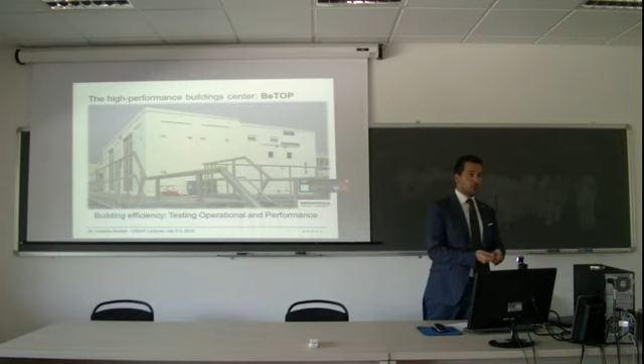Now, to give you the impact of that statement, the entire Canada is 32 million people. The GTA, the Greater Toronto Area, which means Toronto and the neighborhoods, is around 9.5 million, which means a third of the country lives in Toronto. For a large country like Canada, 6,000 kilometers from east to west coast, you have a third of the population in one city. The government has a clear mission to transform the way in which those people are living. In other words, when they give out money, they want to see publications, yes, but they want to see an impact in the way we transform the city of Toronto.

And the city of Toronto is going through a huge transformation, driven by the fact that these row houses are being replaced by huge condos. Our generation loves to live in the city center. We don't love this huge gardening 2 hours away from the core where we work. So everyone is basically moving here. We are making a huge transformation of the city. And if you're a building scientist, you are interested in understanding what kind of city building you can have.

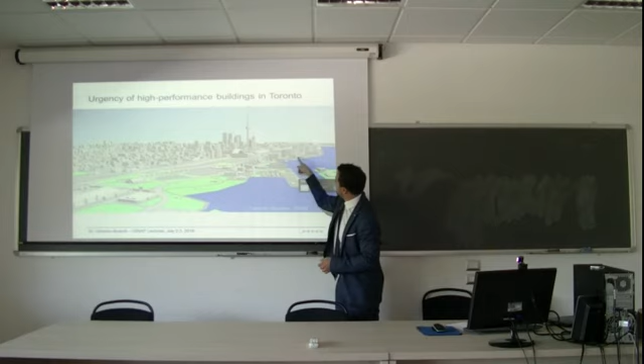And one interesting aspect of Toronto, this is only 10 years. Look what's going on. 10 years ago, it was like this, now it's becoming like this, already built in 2014. And if you see the transformation in 2024, it's basically booming everywhere. This side of Toronto is booming, this side has been demolished, and now it's building up. Typically they're building towers 70 floors high in order to house a lot of people. And the problem with this rate of construction is when you need a huge number of towers in a very short amount of time, what they're doing is just glass towers everywhere.

Now you make a glass tower in the climate of Toronto, you have a lot of problems, okay? So the reality is our mission is to try to understand how the construction sector can engage with a lot of sustainability principles while it's transforming at this rate. So that's actually basically my mission. It's my mission in my daily life, but it's also my mission with you this morning: try to understand what we can do to make sure that Canada can become a better built environment place.

Now, number one constraint: if you think about Canada, you think it's cold. We have a lake in front of us that is almost as big as the Adriatic Sea. So it's kind of a huge lake, okay? And the lake, in winter time, it's frozen. Imagine for one second that the Adriatic Sea gets frozen. It's frozen because we typically have -30 in winter time. So if you are a building scientist, if you are in building physics and you want to study this kind of principle, you need to take into account the fact that the first boundary condition in winter time is pretty chill.

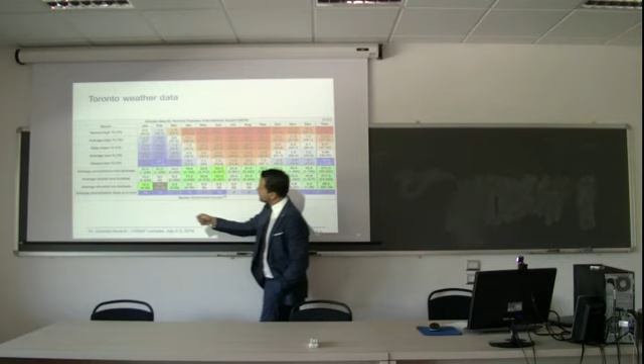So you have to deal with situations that are pretty critical, and then with situations that are 30 degrees in summer. So this is the weather data of the airport from 2 years ago. You see 34, 35 in summer, and at the same time, you see -20, -25 in winter. It's pretty tough to manage, and it's pretty dangerous when you are a building scientist.

So what are we going to do today, and tomorrow? I'm going to present the case of what we've been doing to provide new solutions to the building industry to help sustain this problem. I organized my presentation in different blocks. The first block, which is all we'll cover today, is introducing some nanotechnologies in the building environment. That means we'll work at a very small nanoscale of 5 to 10 nanometers. Everything you'll see today typically applies at a scale as small as a few nanometers.

So the presentation is broken into a couple of pieces. We'll start with phase change materials, then move to aerogels. In the middle there will be a coffee break to let you rest a bit. We'll spend about an hour on phase change materials and then probably 1.5 hours on aerogels.

Then tomorrow we'll increase the scale of attention. We'll focus first on building envelope systems, working on polyisocyanurate, polyurethane, new polyurethane with aerogel—building systems you can start touching. I'll show you some results, new products we've developed, patents we've obtained, that kind of thing. Then, to close the loop, in the last hour of tomorrow's seminar we'll take these nanotechnologies and apply them at the urban scale.

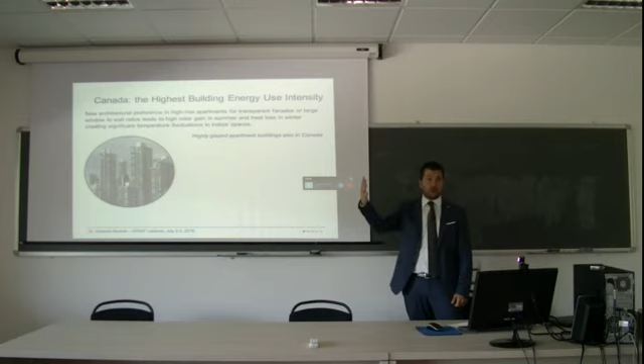You wake up in the morning in a new tower, and the glass is frozen. Remember the Frozen cartoon? The reality is these glass towers are typically frozen, because you sleep overnight, emit a lot of water vapor, the water vapor reaches the glass which is so cold on the internal side since outside is pretty cold, and the condensation freezes on the glass.

If you go on my Facebook profile in the morning, you see a lot of these nice photos of the frozen glass.

So our mission is to try to understand how we can improve the comfort condition inside the building. How can we actually do things in a good way? How can we make sure that the weather constraints become an advantage? Because remember, they're also pretty good if you're able to manage them.

Today it's going to be 36 in Toronto, but overnight it's probably not more than 9 or 10 degrees. So if you're smart enough, the only thing you need to do is shift the cooling night capacity over to the daytime, and that's it. But you need to understand how that can happen.

When you go to winter time, same situation. Typically the biggest problem we have in Toronto is that we need to make sure residential buildings and commercial buildings speak to each other, and we start using the connecting factor between the two.

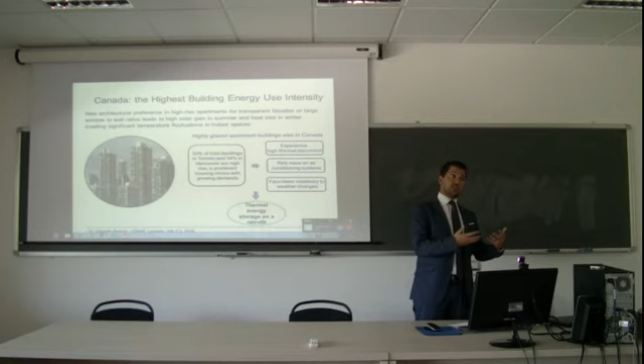One of the good things we've been doing, the City of Toronto has had a cooling district system since 2003, and currently the majority of the buildings are cooled thanks to a lake effect. What we do is take hot water, pump it into the lake, the water comes back cooler, and then we make an exchange water to air, and we cool down the majority of the buildings in downtown.

So there are things that we can do, and my topic of research is how can we scale up this capacity? How can we make sure that this is not anymore an exception, but becomes the general approach for the City of Toronto?

Okay, so the first subtopic in this part of the lecture is about thermal energy storage. Most of you know Luisa, I see a couple of people from Lleida, so these are all concepts that probably for the majority of you will be familiar. Luisa was here some time ago, so probably these are not new topics for you, but I want to give you a different perspective about these topics.

So first of all, what does it mean, thermal energy storage? It means that the material can actually store a lot of energy, if you want. And what I mean is it can store a lot of energy during a phase change from solid to liquid or from liquid to gas.

Now unfortunately the majority of the building codes, and the only prescription you have in North American building codes, is still about R value. I remember 10 years ago I was a PhD student visiting here in Italy, and there was a new regulation when they first put the concept of thermal mass into the code. They put that all the walls had to be at least 230 kilos per square meter. That was the beginning of the concept of thermal mass in the code.

But in North America, you still only have R value. In other words, nobody cares about the thermal capacity of your walls. However, people have started realizing that, wait a moment, my glass tower without thermal capacity is just unbearable - it's not really comfortable at all. There is nothing I can do to fix the problem if I don't introduce some thermal mass.

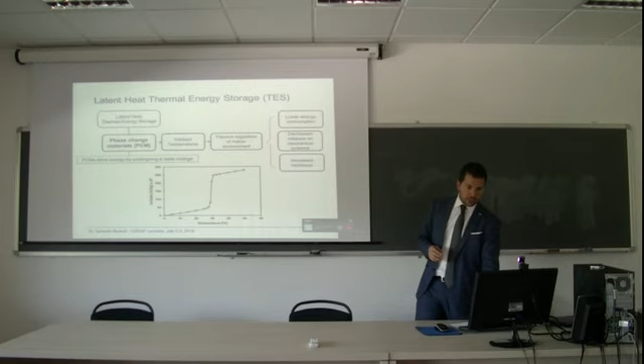So let's see actually what we can do on latent heat and what we typically do in Toronto. In Toronto, we have been working quite a lot on the different properties of different PCMs. And the main constraint of interest for us is the cheapest possible phase change material we can realistically propose to the building sector, to make sure that that material gets adopted by the building industry. So more than dreaming of PCMs that are super expensive and super protected by patents, we typically work on new PCMs that we produce internally in my lab, and we make sure that those products are so cheap that the economic barrier doesn't have to be a barrier anymore.

Now, because we don't only work in labs, but we need actually to make an impact in the city of Toronto, the reality is we often work on real buildings. So what I'm going to show you today is a couple of outdoor lab experiences, but also real buildings. So you will see today real buildings where we have introduced the PCMs.

Now, from a purely scientific point of view, if I present some of these applications to colleagues, they will always criticize them at some level. But please try to understand and align with my mission. My mission is, I don't want to study things that remain in a lab. I want to study things that actually get applied, with all the limits that this may result in. Now, last but not least, we are also trying to develop new PCMs, and I'm going to show you a few research works on those kinds of things.

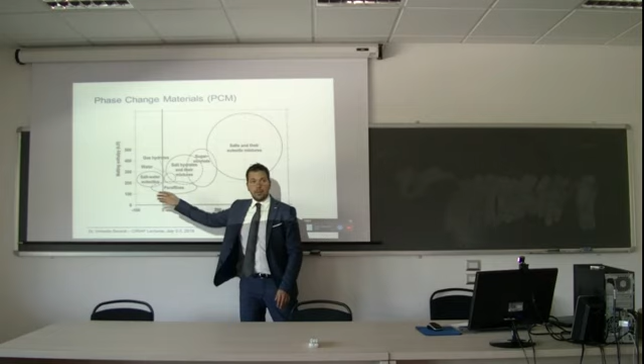So a material can melt at one temperature, another material melts at another temperature, and so these actually give you a different level of application. But then you see another kind of interesting property of materials, which is how much energy that material requires and stores when it actually melts. So you typically see these in kilojoule per liter or in joule per gram, depending on the way in which the material wants to be assessed, if it is in the solid stage, so the gram, the mass, or in the liquid stage, so the volume, the liter. But it doesn't really change that much.

So basically you can see that you have material that takes 100 joule per gram, or 200 joule per gram, or 300 joule per gram, or 400 joule per gram. So remember the water that was able to take actually 300 plus something joule per gram, and water melts from ice to water at 0 degrees, is here. Okay? Water is just one kind of phase change material somehow. Then here you see a vast majority of other products.

Now in a really ideal way, the best material, if you want to store a lot of energy, should have the highest possible melting enthalpy, and should basically be able to store a huge quantity of heat. So if I had to design in an engineering way my material, the idea is it should be always really here. So all these products are not really good because they don't really store a huge quantity of energy. Okay? Now just to anticipate what I typically do, I work with these kind of products, these very weak products. And you will understand why that's the case. But it's important that you understand there are materials that theoretically could store much more energy than the materials I work with.

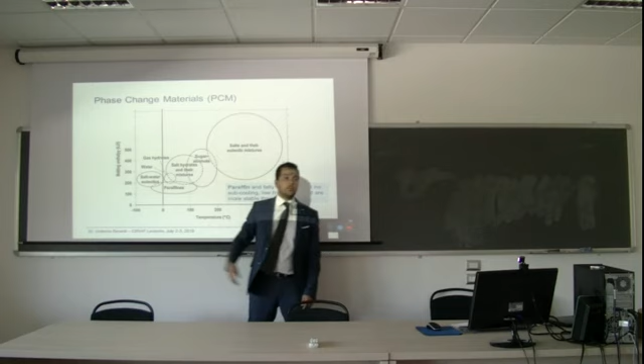Second characteristic: we don't want hysteresis. What is hysteresis? Here it means that basically the product can go cycle after cycle after cycle and not have any problem. It's very stable. It can do thousands of cycles and still not have any change. Salts typically have a hysteresis process. Over 1,000 cycles, they start to lose their properties. What does that mean? It means your battery. Look at this battery. Okay?

The battery of my cell, when I purchased the cell, was lasting 2 days. 2 years later, it only lasts 3 hours. Now, for a battery, you know this is the case. You throw away the battery, you don't care about that. But if that's actually your wall, what are you going to do? Are you going to throw away your wall? You don't want to do that.

So for you, basically in the built environment, the fact the material needs to be stable and not showing any kind of process that changes over time is quite important. So that's actually a boundary condition of why we work on these products. And pay attention, I'm still speaking about products, because there are thousands of different paraffins. So it's not easy actually to select the right one.

If you see this picture again, you see here a huge family. You have products that melt below 0 degrees, or above 100. They can take a latent enthalpy of 100 or up to 200. So what's the product we are going to work with? To select a product, these are some of the properties you need to take into account.

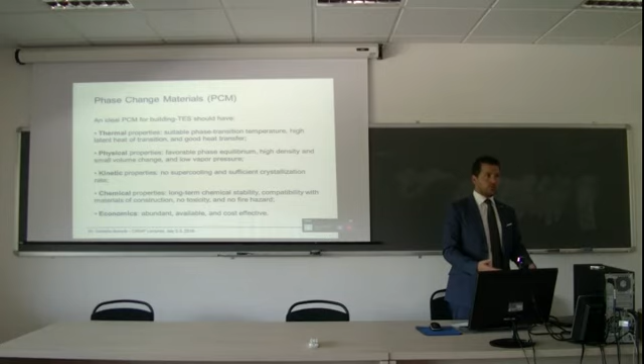So volume stability is important, long-term durability is important, subcooling is kind of important, and last but not least, cost. The majority of the phase change materials, but also the majority of the aerogels that a lot of researchers worldwide are studying, are pretty expensive. So my typical approach is I want to work with the cheapest possible product. It may be not perfect, it may have a lot of troubles, but it has to be cheap. It has to be affordable for the building industry in the range of a couple of years.

And I fully respect people working on better products that may be available worldwide 10 years from now, but that basically is not our mission. We get supported by the government only if we produce incremental innovation. We don't do transformative innovation, we do step-by-step guidance to the building industry.

So, paraffins, big family. Typically this is the chemical formula. I don't want to stress you with chemical formulas too much this morning, but the reality is, depending on the number of carbons you put, it changes the temperature at which freezing and melting is happening. So you can have a chain of carbons that is longer, and it will melt at a higher temperature. It may be shorter, and it will melt faster and at a lower temperature. So you can actually play with these kind of things.

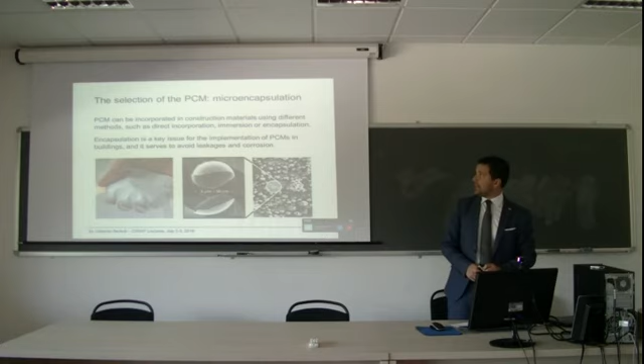Typically, the density of storage is no more than 200 joules per gram, so 200 kilojoules per kilogram. So it's not huge, it's not the best one, but it's actually cheap. So, a couple of applications of these products. When I speak about paraffins, typically we introduce paraffins in building products through 3 different ways.

First one, incorporating the product into a typical porous product. Think about a plaster. Think about a concrete. Think about products that you mix together and you shape together on the site. Then you can add the PCM to that product and get that process.

That's a very bad way to start with zero energy building design. The fact that you don't optimize the window to wall ratio, the fact that you've got almost 100% window to wall ratio, doesn't really make any sense. But the reason why we started in this way is because towers in Toronto are fully glazed. So we wanted to study how to make a fully glazed tower worldwide for energy saving principles.

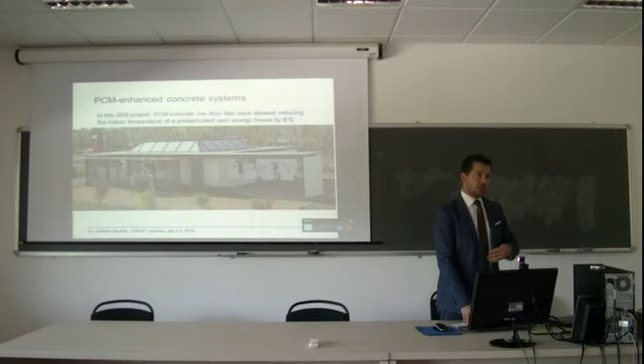Now, one way to control it possibly was through some kind of shading design. This was a shading design that was dimmable, so it was changing, it was dynamic. But here we are describing the application of nanotechnology. And one of the first things we did in 2013 was to this house. This house is still in Toronto. We still play with this house. We have students visiting, living in the house, doing some interaction with this house.

One of the things we did was start studying a floor full of PCMs, or gypsum boards full of PCMs. Now, this house participated in the Solar Decathlon in China. So imagine you build a house in Toronto, and you have to ship it to China. So thermal mass is not an option using a typical thermal mass approach. You don't want a heavy structure. Everything had to fit into a container, be shipped to China, be closed back into the container, and come back to Canada. And the shipping container was paid based on its weight. So we decided we don't want any heavy element.

What we designed for this house when we went to China was this micro tile of about 8 millimeters of concrete with a lot of PCM inside. It was the first interesting approach to look at mixes of PCMs in different concretes. So we looked at the different PCMs in the concrete mix and studied the effect. I'm going to show you very briefly the principles of the results. But the idea is pretty simple.

You have a lot of solar gain. This solar gain will make the indoor environment really uncomfortable, and you want this solar gain to be stored somehow inside the building. We started from the concrete tile, we moved to the gypsum boards, so all the internal walls, then we moved to the glass and a lot of different interactions. So I'm going to show you the majority of these interactions briefly.

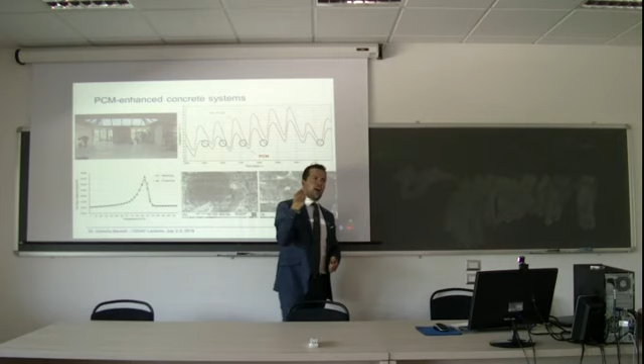What we were doing was introducing this powder, very, very fine sand-like powder of PCMs, microencapsulated PCM, paraffin, into the concrete mix while we were creating it. The substitution was typically in the range of 10 to 25% of the volume of the concrete, which was pretty high. In mass it was very limited, typically from 2 to 6% mass of PCMs.

The different PCMs were characterized. Here you can see the material was melting at one temperature and freezing basically at the same temperature, which is what I was telling you before, no subcooling. When a product has subcooling, typically the blue curve peaks at one temperature and the black curve peaks at another temperature.

In other words, the material doesn't melt and freeze at the same temperature. So this was the first kind of interesting aspect we wanted. The second one was about the enthalpy that was able to be stored here. The third aspect actually is also pretty interesting.

When you go to high school, but even in physics 1 in an engineering school, they typically tell you that the process of phase change is isothermal. So when the ice moves from being solid to liquid, all the process happens in an isothermal way. When you want to cook your pasta, you put water, turn on the gas, it starts boiling. That is an isothermal process. The water will stay at 100 degrees until everything evaporates.

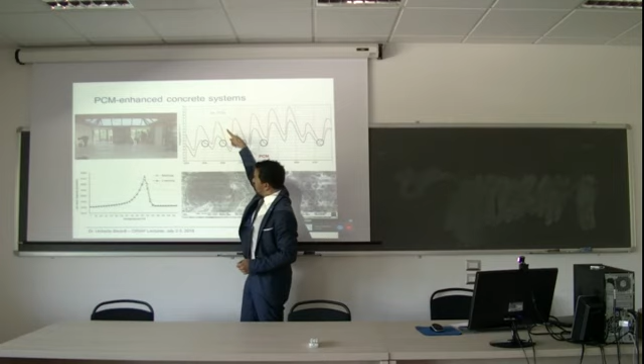And then the blue line is the same house with these concrete tiles, and you can see this temperature stabilization process where the product stores a lot of the internal gains and the temperature gets much more stable than before. So the swings over the day without the phase change were significantly beyond 10 degrees, while with the phase change the swings were only in the range of 5 to 6 degrees. And so night and daytime compensated each other.

A couple of other studies were looking at the phase change in the concrete mix. You don't see that much, probably. Do you see it? More or less.

So this is, for example, the amount of energy that we could store in terms of capacity for different percentages of PCMs. So no PCM at all, and then in mass 1%, 3%, or 5% of PCM. This is one characteristic of the PCM, but we used different PCMs. I don't have time to show all the results, and if you're not in PCM, it's also not worth it. But what you can see is you can start working depending on the amount of energy you want to store in terms of different capacity of the product.

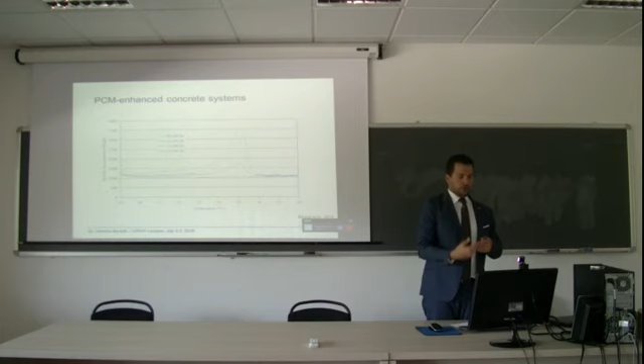So if you have a concrete mix, what kind of product might you want to do? It's typically not for structural applications, so you don't do the beams or columns of a concrete building, but for slabs, or mortars, or other similar applications these are still pretty okay products. The compression strength gets reduced significantly, but we still use concrete in so many different applications. And base concretes by themselves are materials with good thermal capacity, but the phase change increases the capacity of a concrete product by far.

Okay? Another thing we looked at more recently, in the last couple of years, was gypsum boards. We have all these towers in Toronto that have been built over the last decade. What can we do for these kinds of boards? The easiest way to retrofit this kind of high-rise is by changing the gypsum boards. In North America in general, we don't have plasters, we have gypsum boards. The gypsum boards get screwed in and out very easily within the day. So that was by far the easiest way to reconvert these kinds of high-rise buildings.

So we started working with different companies. We had the patent with BASF about PCM gypsum boards that they are currently manufacturing and selling, not in Italy. It gets sold in Germany, Austria, UK, and US.

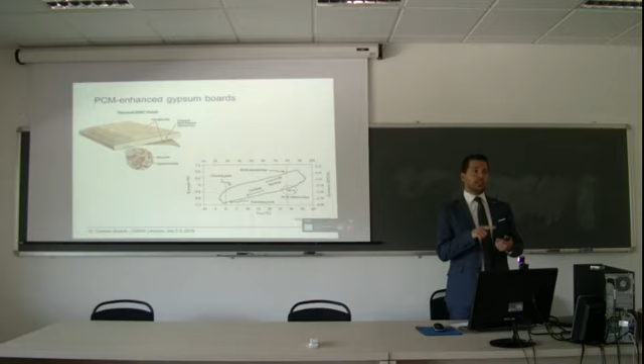So what we have been doing is basically introducing different micronized PCM products in the gypsum boards. Now we work with different products. Just to give you an example, this is an overview of products currently in the market that you can almost go on Amazon and buy with PCMs inside.

Typically plaster boards, little panel, blanket, tile. These are very, very thin layers. Just to give you the sense, the thickness of these layers, they go from a couple of centimeters to as thin as 5 millimeters. So very thin boards, typically 2 by 2 meter or 1 by 2 meter.

You get a lot of PCMs in these boards. You need to select the PCMs depending on the temperature you may want to have the phase change. You need to establish the latent heat of fusion that you may want to have. And last but not least, a property I haven't spoken much about, thermal conductivity.

So these are products you can almost buy. You go to Amazon for your house, buy this product, and put it behind the wall. Very simple. Now what's typically happening when you buy this product is that you put something behind the wall and pretend that product is going to store a lot of the heat, and that's not happening.

Because the heat goes in other directions and doesn't really pass into the wall. Even if it touches the external layer, it doesn't propagate, because typically paraffin has a very small thermal conductivity. So the thermal capacity is big, but the speed of this process is pretty slow.

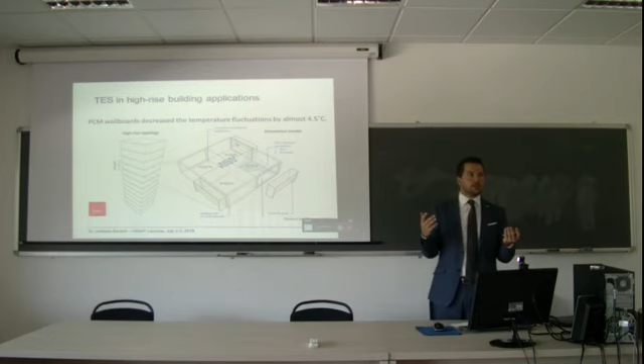So the fact that you have these problems makes this an interesting topic of research. And if that's not enough, you need to understand that different orientation of the building in a climate such as Toronto means different solar gains. Different solar gains mean different radiant temperature. Different radiant temperature means different comfort conditions inside. Everything gets broken across a bunch of different conditions, leading to different kinds of results.

Just to give you an idea of a study published a couple of years ago - one of the problems of phase change materials for people working in this field is that they act at one temperature and aren't really active anymore at another temperature. So the majority of applications we've been looking at is for summer thermal energy storage.

Because in summertime, you don't want to get overheated inside, and you don't want to have a huge cooling demand in the middle of the peak of summertime when outside it's super hot and inside you need to use a lot of cooling.

But in a city like Toronto, we also have a similar but different effect during winter time. If you come into my office, for example, there's huge solar gain, huge internal gains from computers and people - even in wintertime we get a pretty good cooling demand. Unfortunately, overnight it's -20 outside. You could easily cool down your building by using fresh, chilly air in the middle of the night. So how do you balance the capacity so you can shift the cooling power you have overnight into the daily profile of your building, which otherwise has another cooling demand?

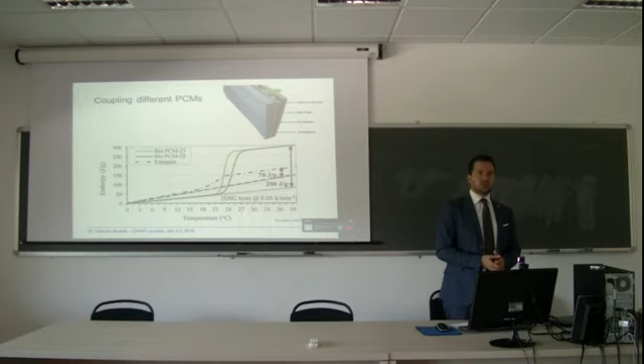Unfortunately it only has a transition in the range of 26 degrees. The reality is that right now we have 23, 24, or typically in an Italian building 26 degrees is okay. But in North America, an American guy at 26 degrees will never sustain that temperature, so these products typically do not work at all there, because nobody wants their house to be at 26 - they love this chilly air in the middle of summer. The only products that work effectively are the ones around 19, 20 degrees.

Okay, so just to give you - do you want to have a break? Tell me when you want, okay? No problem, okay, I have no real thing.

So I put together some slides to give you an overview of this. I just want to jump to the results to show you what we've been doing in terms of experimental work, and then all the presentation will have all the results. I put together some papers into a folder shared with Professor Kodana, and all these things are covered one by one in different papers, so you can always refer to the original paper to get an idea.

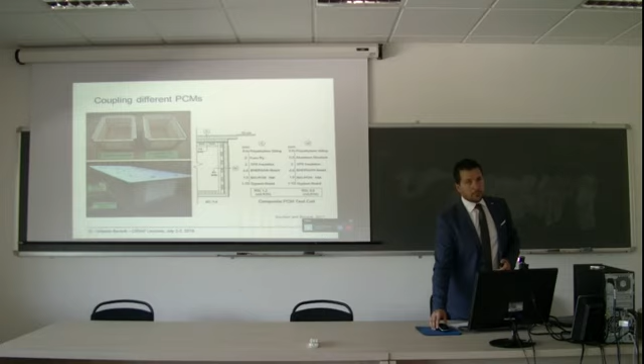We started 5 years ago with small test cells, which were only a meter by 1 meter, so not really big. Now we started scaling up - we did experimental work at full test scale, 3 meters by 3 meters, and now we did an entire apartment. What we've been looking at is the different effects of different PCMs and different boards in very thin layers.

The best result, just to give you the sense, is in Toronto. And when I say Toronto, it's because all these studies are climate dependent - you do the same study in Perugia, you get different results because the boundary conditions are different, the weather doesn't swing as much as in Toronto. In Toronto, the fact that it's very chilly overnight helps us do a lot of thermal storage. We did the same study with a colleague in Vancouver - there, phase change materials do not really work that well, but when it gets warm there it stays warm during the night, and when it gets windy and chilly from the ocean effect it gets chilly through the day. So Toronto is a strange combination - very tough to survive, but a very interesting swing of temperature over the day.

So this is a typical condition we managed to have - this is actually the result of the Tridel units, a real building. Each unit was 100 square meters, a typical apartment unit. These are the results with side-by-side units, with the PCM boards and without. In this case the PCMs were 2 centimeter boards, 7 millimeter, 7 millimeter, and 6 millimeter of different phase change materials, so we were working on a combined package of effects of different layers. What we typically obtained was a peak reduction of temperature of a few degrees.

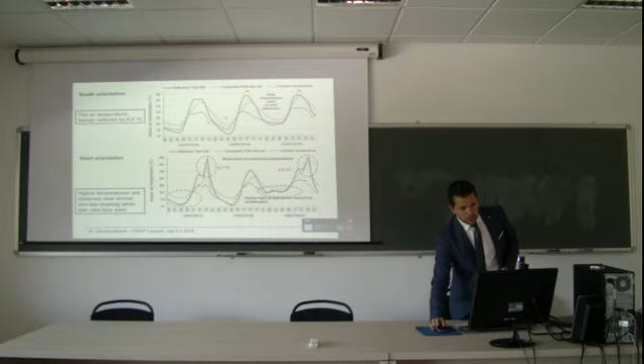Okay? And so this is the case for different units, south-oriented and west-oriented. And what you can see in the light green area is that the peak gets lower and the temperature over the night time gets higher. These are hours of the day. So this is 2016, July the 3rd, July the 4th, July the 5th. Then you can see the swings of the temperature get much more mitigated, delaying the peak, and temperature reduction in the range of 5 to 6, 7 degrees.

Okay? A couple of other effects. We worked on the effect of shading. Because one of the things when we study PCMs: in the lab, they work perfectly. We put them in the DSC, we do the thermal characterization of the product, they seem to store a huge amount of energy, everything seems perfect. You go to the site, the first thing that people do, they change the thermostat, and it gets destroyed.

The second one is the blind effect. In occupancy models, there is a very small amount of understanding of the blinds effect. But the blinds affect the thermal radiation, and that affects the phase change properties. So in one of the studies we did, we monitored curtain models in order to understand the PCMs' effectiveness.

Now, this is where you start seeing the building science agenda coupling different sides of physical technique in Italy. We never thought about people, but by studying dynamic envelopes like phase change, a product that changes with time, you need to start taking into account what's going on with the shading effect. You need to start taking into account what's happening with different set points. And these are the results.

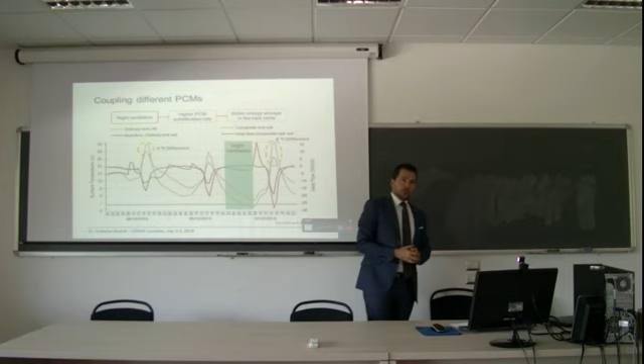So typically, if the shading was working well, the PCMs were able to reduce the peak by 8 degrees. If the shading was kind of lazy, so the person wasn't properly adjusting the shading depending on whether the sun was there or not, then the effect was only a few degrees, 3 to 4. And this gives you the sense of another interesting fact.

You can put a lot of money in PCMs or in any other high-tech technology buildings, but if the occupant doesn't help you in properly managing that kind of technology, you still suffer a lot of reduced effect of these systems. Okay? Another thing that we worked with, for example, was educating the person to night ventilation.

So the phase change material, the only thing it does is store some level of energy in the day. Okay? But that energy needs to be released overnight, otherwise it's your battery. If your battery is being discharged and you don't recharge overnight, what's happening the next day? You don't have your smartphone, because your battery is still basically dead. Okay? So you need to recharge your battery.

And when it comes to a PCM, you need to basically cool down your system to make sure that the system has a lower set point early in the day, so it can actually increase the temperature overnight. And you know, ancient people used to call it night ventilation. It's not really a difficult concept: overnight, when the sun is not there, please open your window, cool down your envelope, and make sure your envelope gets cold, ready for the next day. But what does that mean when you have a tower?

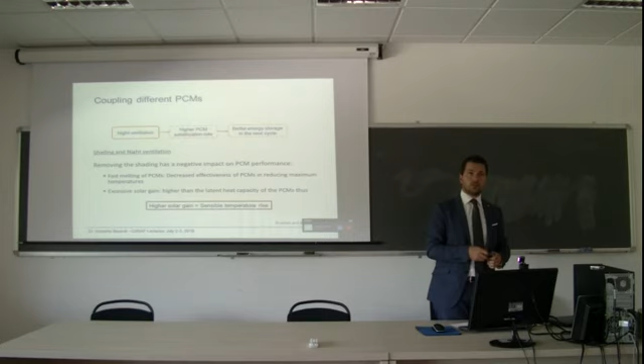Just to give you the sense, in my house, my condo apartment has windows of this size. Okay? Because everything is glazed, but they don't want us to go outside, so we don't have a balcony, and we only have these little windows at the bottom of the floor for a small amount of fresh ventilation. The rest of the ventilation is centralized from an air conditioning system for the entire building. So we're working on different ventilation rates, and the effect of different ventilation rates for different kinds of study.

To give you the sense of the ventilation rates, the optimum ventilation rate was in the range of 1.5 liters per second per person. So you need to start coupling the ventilation with the PCMs to start seeing the effect. We worked on the effect of different PCMs, not only as a coupled material, but one by one. And we saw the effect if this little tile was put on the ceiling, or on the walls, or in different orientations.

Now typically you understand the effect. Thermodynamics and convection will tell you that warmer air will rise, and so if you want to control the heat wave in the summertime, probably the ceiling is the best position for your product. So you should use PCMs more on the ceiling than on the walls. But on the other side, the wall sometimes gets direct radiation from the sun. So the surface temperature may be higher because that wall gets some sun for some hours of the day.

And so one of the studies that you can look at is the effect of different PCMs for different sides of your unit. Okay? So just to give you the results, we realized that south-oriented facades are the best ones for PCMs. East and west are not really that optimal. They typically suffer internal gain that is pretty high. North facades are okay. So if I need to suggest to somebody where to invest money, south and north are the best. East and west not really that good.

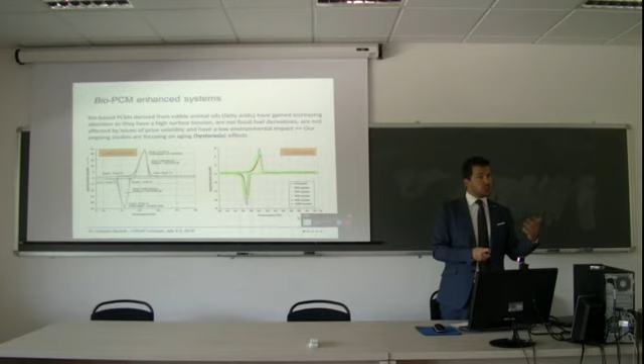And that polymerization is a pretty simple process. The product remains super cheap. So for people interested in finishing materials that are not really expensive, this is a possible direction. But that has a couple of problems. Problem number 1, called subcooling. Charging, discharging. Okay? The mode is the same, but the temperature at which the peak occurs differs slightly, by 3 degrees. In other words, controlling subcooling is not really easy.

Second problem, hysteresis. So the product does the first 200-300 cycles well, and as soon as you start putting 600, 700, 800, over 1,000 cycles, it starts reducing the effect. Now what does that mean? Well, it means that if this product has to do a daily effect, so charging and discharging every single day, summer and winter, after a couple of years you start losing the effect. So that's a big problem.

If the product is used for seasonal storage, so only summertime, then typically no more than 50, 60, 70 cycles per year. Then you can actually have a product that lasts 10 years. Okay? Same effect as your battery. If you don't use your battery that much, your phone never gets used, your mom's phone gets charged once a week, your battery lasts 3 years. If you use your phone so much that every day you need to charge twice, then probably after 1 year the battery needs to be changed.

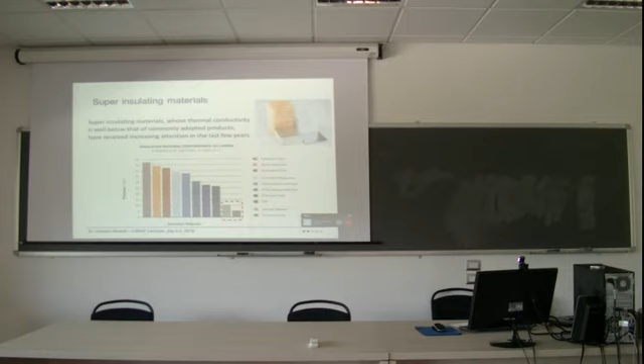So, second topic of the morning, a different nanotechnology. It's probably our main research center focus over the last few years, which is about aerogels. How many of you have ever heard about aerogels? Because here in Perugia there are a few people doing it quite well. And so I'm going to present a slightly different perspective on this material, which is what we have been doing in Toronto, which is synthesizing a different aerogel ourselves. So we use our own aerogel product, basically.

So what is this product? If you compare different insulating materials, here is a comparison chart showing you the thickness that is needed in order to have an R value of 1 in imperial units. We basically see that more or less all the materials have similar thermal conductivity, but over the last few years we have been seeing an increasing demand for new super insulating products.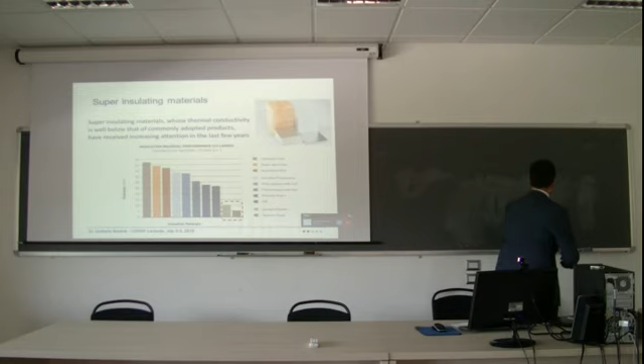Now, what is a super insulating product? It's basically a material whose thermal conductivity is well below 0.02 watt per meter Kelvin. Okay? So these are products that have a very, very small thermal conductivity, and as a result you can achieve the same thermal insulating effect with a much thinner layer. So the value of these products is basically shown in this picture.

You get the same thermal resistance, but the material is very thin, so it can be used a lot in retrofitting applications, and especially in Toronto it can be used quite effectively because you don't use a lot of internal space. And to give you a sense of the value of this advantage, currently in Toronto we pay around 12,000 Canadian dollars, so basically 9,000 euro per square meter.

So when you purchase a place, it costs you 5-6 times what it will probably cost in a medium-sized city in Italy. And given that kind of result, and given the chilly environment that we have in wintertime, it's pretty important to have R values that are high, and typically Toronto trends are currently pushing R values around 20, which with a normal mineral wool of fiberglass or rock wool will mean 25-30 centimeters of thickness of insulation.

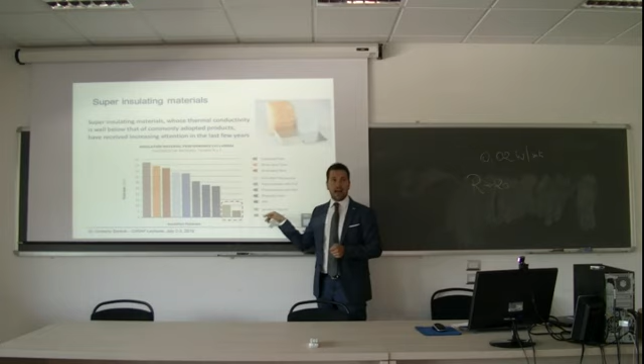That will mean a lot of cost. So there is actually a demand for super thin insulating layers able to give you the same impact. Now there are basically two materials that can do that. One is the vacuum panels and the other one is the aerogel. Vacuum basically creates a vacuum and so stops any kind of gas conduction or convection heat transfer. So it is pretty effective, theoretically the best possible insulating material, but there are a lot of troubles in the long-term profile.

In other words, you create a vacuum and the vacuum doesn't stay a vacuum for very long. And it cannot really be suitable for applications with different shapes, it cannot be punctured, so it's pretty risky to promise that you put in the vacuum insulating panel and 5 years later the vacuum is still a vacuum. Often that doesn't happen. And so we have been working on aerogel, which does not have all these problems of the vacuum. They're not as good as the vacuum, to be honest, but they're way better than typical other materials. So what is an aerogel?

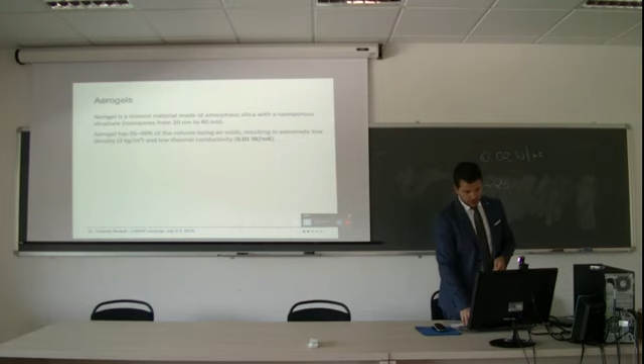Aerogel is a very old product, I should be honest. In fact, its original synthesis dates back to 1931. So it's basically almost 80 years old. It's also been famously known as frozen smoke. You have this gel that, by removing the liquid phase, becomes like a smoke that gets frozen in a solid mass. So it's translucent in behavior.

And why it's so important: theoretically speaking, you can have a thermal conductivity as low as around 0.01 watt per meter Kelvin. It's really not like that; these days it's 0.013, 0.014, but that's the range of thermal conductivity we get with this product. The product is completely non-toxic, and it's pretty light. It's actually the lightest material that we know. We're speaking about things such as 50, 60, 70 kilos per cubic meter. So you have a cubic meter and you can easily lift it with this product.

Now, why is this product so good, why is it attracting so much attention, and what are the limits? Because every single time there is a novelty, there is always a big issue, a big challenge, a big limit. This product is basically a completely porous product. So it's air, there is nothing inside it. And that's why it's so light and so good in thermal conductivity. The secret of this product is that in its structure, the network of material aligns in small cells. These small cells are also called beads on a string, so they are little closed chains.

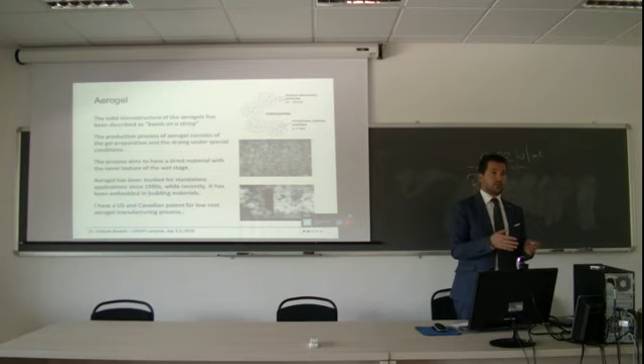Now, that air cavity transfers heat through convection, and also transfers a lot of it through gas conduction. So the cavity basically allows some heat to move. But in an aerogel, this movement doesn't happen, because the air cannot move from one pore to another pore, because it's blocked.

Now, this kind of product was created many, many years ago. However, it was extremely expensive, and it's still quite expensive. But at that time, it was really incredibly expensive, and it was only able to be produced in very small quantities. And only in the last two decades have these products started becoming more common.

Okay? Now, aerogel is not one product. Similar to the PCMs, there are tons of different aerogels. So rather than speaking about an aerogel, people should say that they work on one of the big families of possible aerogels. Because an aerogel is nothing more than the capability to create a gel, not different from the gel I put on my hair this morning. Really, it's the same gel, and then evacuating the liquid part.

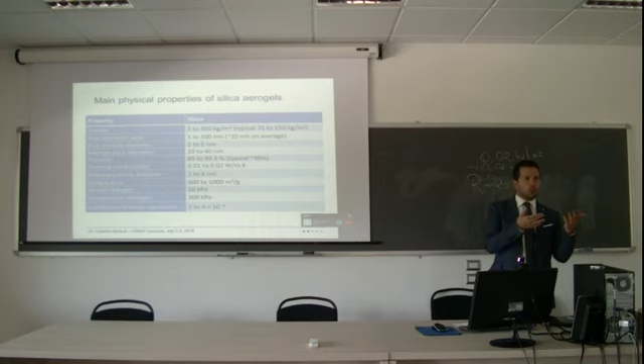So when I put the gel in my hair this morning, it was liquid. I was touching it, it was liquid. Then I put it in my hair, and naturally the liquid evaporates. Okay? So there is a gel where at one point the liquid stage is not there anymore. Now the aerogel does the same thing, but when we remove the liquid part, we want the gel to be crystallized. We want the gel to be in this little shape.

You know that my gel in the hair is now pulverized, so there is a particle here, a particle here, a particle here. So it's not really crystal. But an aerogel is typically a gel where you have created the evacuation process and the material has been crystallized in a very regular shape. Now, to have this crystallization process happening, you need high pressure and high temperature. And high pressure and high temperature means high cost.

And the impact of this kind of process is to have a product that is extremely light. Depending on the process, you can have density from as low as 3 kg per cubic meter to as high as 300 kg per cubic meter. But it's still pretty light, typically in the range of 70. Typically you want the material to be crystallized in particles with a diameter of 3, 4, 5 nanometers. So very, very small ones.

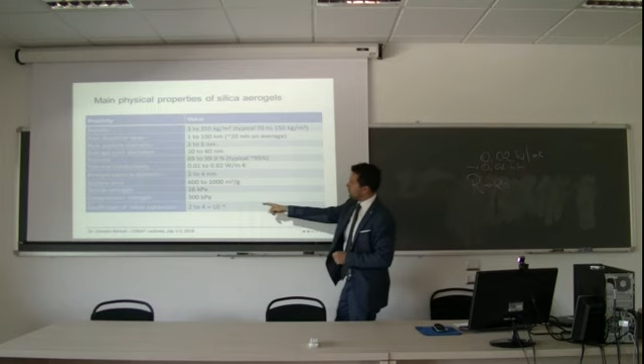Typically you want the porosity of the material to be above 90%, typically above 95%, but we have seen products with porosity as high as 99%. And here is actually the problem of these products. Typically these products are really, really fragile. So they don't have any strength.

Have you ever seen an aerogel or not? Okay. You want to see an aerogel? Yes. So you get an idea of what it is. Not my fault, okay?

So look at this. This is nothing more than an aerogel. It sticks on my touch. This is a blanket of aerogel. This is the aerogel powder that you are seeing flying. Look at this. You see the powder? This is the aerogel. And as you can see, it's really powdered. When I speak about 2, 3, 4, 5 nanometers, you can almost see it. Now, this is basically nanoparticles all together. So this is the secret of the product.

Okay? Now, what's the problem with this product? This product is extremely fragile. If you take an aerogel in your hands, it's super easy to crush. So the problem is, how can we make this product something we can use in the building industry? Now, the most common application these days is an aerogel blanket, like these ones.

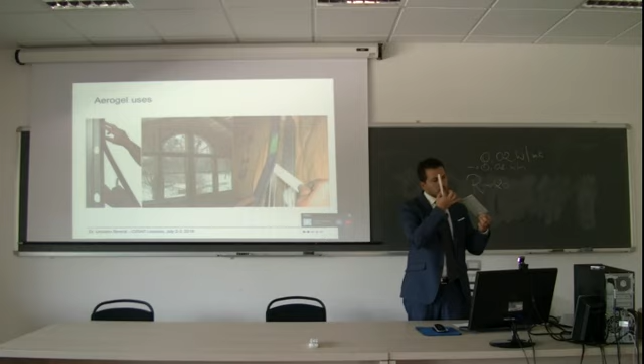In the silica gel process you saw this morning, the fiberglass collapses because the liquid form makes it collapse. Then we evacuate and compress the product, and what happens is that the aerogel gets stuck into the fiberglass fiber structure. So this is a normal fiberglass, but the aerogel is attached to it. We typically create what we call blankets.

These materials are very thin, just a few millimeters, but they may have the same impact. This one is basically equivalent to 5 centimeters of mineral wool or rock wool. So you can achieve pretty good results. Well, where is the problem? Always in the cost.

This costs nowadays about 14 to 15 euros per square meter. You can buy a normal insulating product for 2 to 3 euros per square meter. So you typically have a factor of 4, 5, or 6 to fill the gap between the price of these products and the price of normal insulating products.

The value is, for example, if you have a vault - think about a historic building - how can I put polyisocyanurate or XPS or EPS there? I can't. But I can put the thermal insulating plaster.

A normal thermal insulating plaster typically has a thermal conductivity of 0.3. An aerogel-enhanced thermal insulating plaster has a thermal conductivity of 0.2. So I can basically increase the thermal resistance of the layer by 50% by enhancing the plaster with these particles in the mix. The problem is the cost.

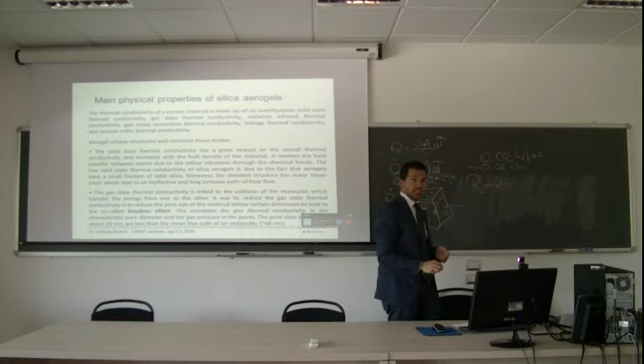With a different thickness, now in a porous material, all these things happen together. There is a matrix of solid - some level of solid material in a porous product - and heat transfers through that material. There is also a cavity, so heat transfers through and moves into the cavity. There is radiation too, because with porosity, if one side is warmer than the other, heat transfers through radiation. And if the material is porous with open porosity, like with cracks, air can move from one side to the other.

We call it tightness, and that moves some air. With the movement of air, there is some heat that transfers. So basically, in a porous material, there are 6 different heat transfer modes: conduction through the solid matrix, conduction through the gas matrix, convection, radiation, air movement or air leakages, and then the coupling effect.

In Fisica Tecnica 1, you typically study convection as a different process from conduction, and conduction as a different process from radiation. But in real nature, phenomena are coupled together. So conduction enhances convection and vice versa. The different things are actually all coupled together. So typically, you have 6 different heat transfer modes: 2 conduction, 2 radiation, and 2 convection all together.

Now, in an aerogel, all these 6 transfer modes are minimized as much as possible. You minimize heat transfer through conduction by making sure that 99% of the product is porous. So you only have 1% of solid material. So conduction goes to 0 because there is no mass.

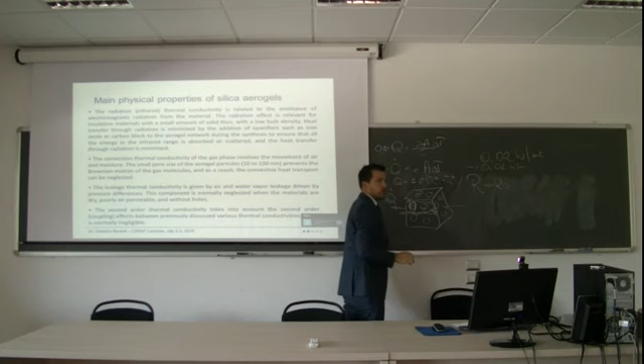Convection goes closer to 0. Why? Well, because remember the structure of the material, with little holes with a lot of particles? The air cannot move from one particle to the other.

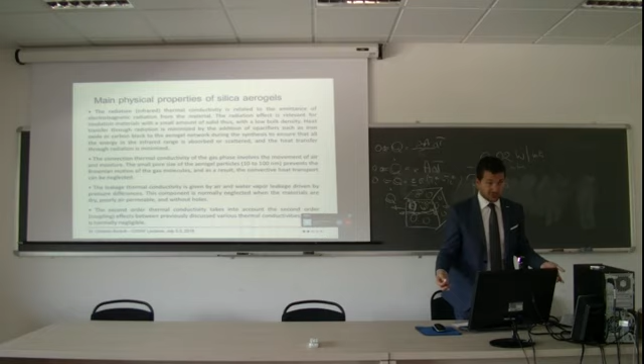And then radiation goes to 0, or closer to 0, because we add an opacifier, a product that has very low radiation. And if you remember the Stefan-Boltzmann equation, radiation depends on emissivity. If the emissivity of the product is closer to 0, then the radiation gets closer to 0. It's kind of a black body in thermodynamics 1.

So, overall, an aerogel is a perfect engineering material that stops conduction, convection, and radiation in a very good way. Now, the problem is, it took forever to have an affordable price. Although it was invented in 1931, that's the patent, for 50 years nobody was able to reproduce this product in a cheap way.

And then 20 years ago, a couple of companies, both located very close to Boston - one is Aspen, the other is called Cabot - started engineering this product in an easier way. And I'm going to show you the way in which they've been doing this.

And nowadays, these products are extremely common, but not into the building industry - typically in the pipeline industry. And typically they're not common in applications in our climate, but are super common in applications in northern climates. If you are in Russia, and you have district heating, it becomes extremely easy to cover a pipeline with steam inside with a blanket like this. Because the blanket gives you a huge thermal resistance in a very thin layer in a pipe that is under the ground with steam inside.

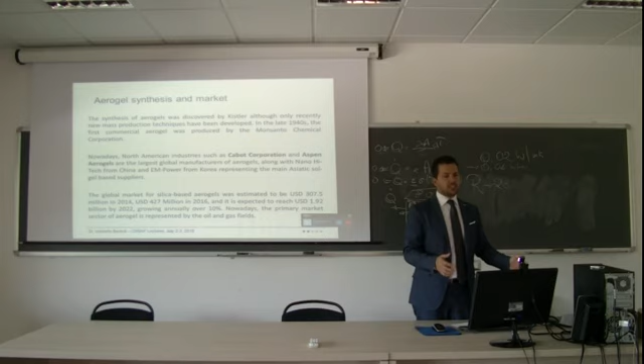So the product is pretty used. Just to give you the sense, over the last 10 years this product has been increasing its market year after year at a rate of 10%. So the product is starting to be pretty common. Currently the market for these products is 1 billion. So it's not huge, but it's not small. It's just not huge in the building industry - it's a bit more common in other industries.

How does this product get created? Basically, you put two polymers, mixing them together in a bath - water sometimes, more commonly alcohol. These two polymers start condensing. You create a gel. For people doing cakes, it's no different - when you put two polymers together it creates the gelatin for your cake.

Same process. Once you create this gel, and once the gel is pretty solid - think about, to give you an example, the gel I put in my hair this morning, it's called an aged gel - in other words, the gel is fully created. It's completely gel, it's completely solid.

At that point you have a gel, and then you need to do something that is extremely difficult. You have a gel that still has a wet phase inside, there is some water. You need to remove the water. In reality, you don't remove the water, you remove the alcohol, because originally you put alcohol in the basic material. Now, if you're able to remove this wet component of the gel in a super critical way, basically what's happening is you create crystals of material, so beads that are really long.

And this is an aerogel. It's very hard to speak in this room. If we were in a lab, I'd be able to show you how to do this kind of gel. It's not impossible, it's pretty easy. The problem is how to dry this process, how to make sure that the drying still keeps the chain of the aerogel up.

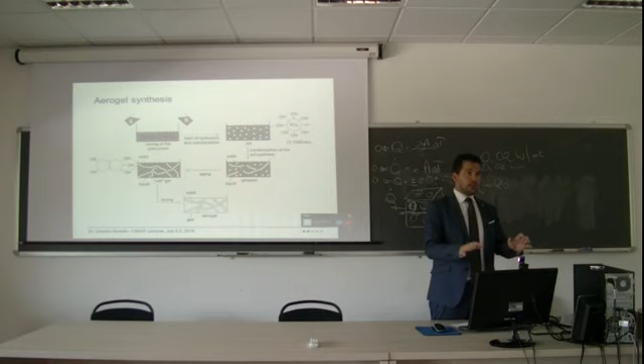Another process: this kind of evacuation of the wet part originally was evacuated and lost, evaporized. These days we say, wait a moment, this is expensive, so when I remove it, I want to reuse it in another cycle. So the wet phase needs to serve again for another cycle of solution.

This is basically how we've been working over the last few years to make aerogel a bit cheaper. We want a much cheaper product. We need to use cheaper raw material, closed loop cycle, and subcritical drying. And that's the aerogel.

So this is actually how to make an aerogel, what I just told you so far. It's not really impossible, it's something chemical people can do, and they have a couple of challenges. The main one is the drying process. If you're able to do a drying process where you remove the gel at ambient temperature and ambient pressure, then the material becomes extremely cheap.

Ambient pressure is what my gel is doing in my hair since this morning. I'm just walking around Perugia and the water is escaping. Right now it's completely dry.

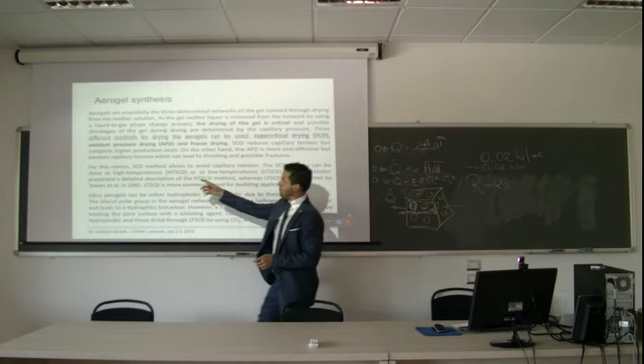The process done this way unfortunately doesn't create the network of the aerogel. To create the network of the aerogel, these days we do ambient pressure but high temperature, so basically microwaves. We are removing the liquid in ovens, and we are collecting all the liquid to be reused another time.

A couple of characteristics: if you've seen some aerogel that, for example, Professor Berardi may have in his lab, the aerogel you've been using is typically extremely transparent. Our aerogel, the one we do in my lab, it's not really transparent. The projector isn't the best, but you can see it's kind of white, really white, not really transparent.

The good side is this is much cheaper than the commercial one. The bad side is, do you want to use that product in a window? No, because the window doesn't really remain fully transparent.

But the idea is that we can create aerogel, or immerse fiberglass into a gel, evacuate the alcohol in a microwave, and then create fiberglass blankets like this one. So this is basically fiberglass: it was 5 centimeters, put into the gel, collapsed the fiberglass structure, evacuated, compressed to 8 millimeter thickness, boom, aerogel blanket with a thermal conductivity of 0.016.

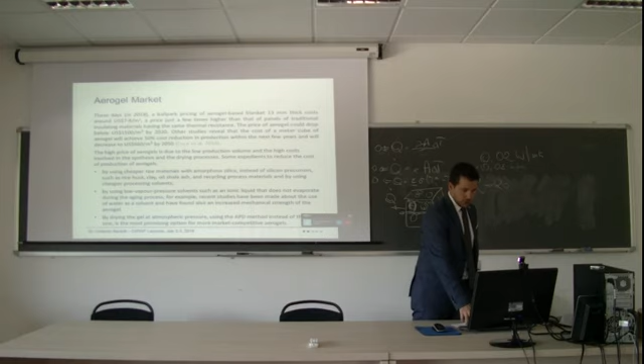So what do we do with these particles? Typically these particles in my lab we use in a lot of porous materials. One of these is, for example, concrete. So we've created our own aerogel, this little particle, this little kind of sand or powder, whatever you want to call it—it's very, very fine. It's this one that you see.

And then what do we do? We basically go to mortar and we remove some sand and we put the aerogel. Okay? If you do that, the more aerogel you put, the more this kind of concrete becomes a lightweight mortar and becomes a super thermal resistant mortar.

Okay? Don't worry about photos. You actually have the PowerPoint already. You can take the PowerPoint. Don't worry about it.

So this is basically normal, classic. This is a master thesis of a student from Bologna. He visited me a couple of years ago, and the only thing he learned over his visit was to make mortar and concrete. Okay? Creating the aerogel, putting it into the mortar, and this is basically the idea of this product. The idea is to have material with a thermal conductivity that is much lower than typical concrete.

To give you the sense, thermal conductivity of a concrete is in the range of 1 watt per meter Kelvin. Okay? So 1. These products, these are all aerogel products, have a thermal conductivity of 0.2. In other words, 5 times more insulating than a typical mortar. Look at the order of magnitude. 10 times more conductive than an aerogel alone.

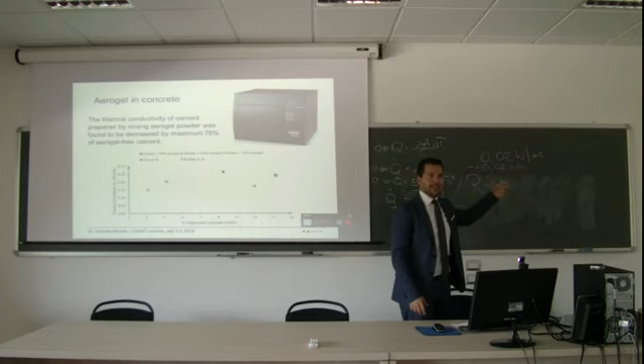So I'm not saying that this is a super insulating material. It's still a concrete, it's still conductive, it's 10-20 times more conductive than an aerogel, but with respect to a typical concrete, it's 5 times more insulating. So if you want to do parapets, balconies, these kinds of things, it's okay.

And it's okay if you see the compressive strength of our last product, basically it's above 10 megapascal. And 10 megapascal is what you typically use for a low-bearing concrete. So not the columns, not the beams, but the screed that you put on top of floors. Okay, so there are applications that can use this kind of product.

The more aerogel you put in volume, the lower the thermal conductivity becomes. Okay, so just to give you a sense, we're using in this case actually a super strong concrete. Super strong concrete easily has thermal conductivity above 1, 1.5 up to 2. As soon as you start putting more aerogel, you start reducing the thermal conductivity significantly.

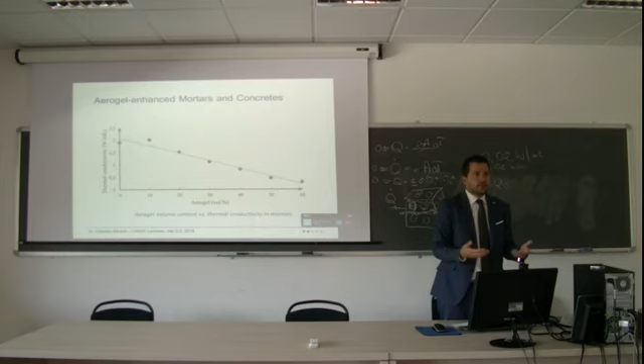Now if you look at this graph, a volume of 60% of aerogel. A volume of 60% means in mass typically 2-3% of aerogel. So if I have a cubic meter of concrete, 40 kilos is aerogel, but it's a huge volume, because aerogel is so light that you need a huge production to have it. And then that's actually the thermal conductivity you get. Okay? And here you see a bit more of the numbers.

What typically happens once you start putting more aerogel? Well, the aerogel gets distributed into the concrete. And here you need to look carefully at what's going on. If the aerogel distributes homogeneously into the concrete matrix, so if it goes everywhere, you see this is an aerogel, you see the white, the thermal conductivity will go very low. If it gets concentrated somewhere and not somewhere else, the thermal conductivity doesn't really reduce significantly.

So this is basically one of the applications. Another one is plasters, what Professor Berardi has been doing over the last few weeks. The value of these products is that a plaster can be as light as 100–150 kilograms per cubic meter, so it's pretty light. It's a super light plaster. If you take an aerogel-enhanced plaster product, it's almost rubbery. Okay? It's not really plastic.

If you touch this plaster, it's concrete based. This is concrete plaster. Oh, well, this is gypsum board. It's not even concrete plaster. Okay, this is actually concrete plaster. You see, it's kind of strong, and it's not deformable. Okay? It doesn't have any flexibility.

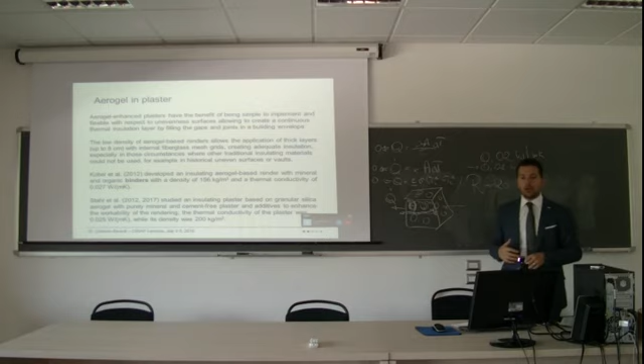An aerogel plaster becomes rubbery, so it can be easily shaped around curved shapes, 3D shapes. And the typical value of this is that the thermal conductivity can remain as low as 0.02, 0.03 maximum. So it basically acts as mineral wool, but it's a plaster. So think about your application in a retrofit or a historical building. You have a plaster that effectively has the same thermal insulation property as mineral wool.

So when you speak with the superintendent and they don't want you to put mineral wool, you can say, I put plaster. The only problem is that you need to start having more significant plaster thicknesses. For example, there is a company from Denmark that has a special grid that allows you to have plaster with aerogel up to 6 centimeters in thickness. You typically don't put 6 centimeters of thickness in such an application, but if that's going to be your thermal insulating layer, that's probably the thickness you start considering.

So this is another PhD thesis that we did. Actually, this is a master thesis, and these are different hydraulic plasters from Italy or from Canada. So different cement-based plasters with different percentages of aerogel: 25, 50, 70, and I have many more photos if you want to see.

And if you see, typically the plaster without aerogel is very compact, okay? It's very finished. As soon as you start putting more aerogel, the surface becomes rough. And there is this porosity of the aerogel that remains there.

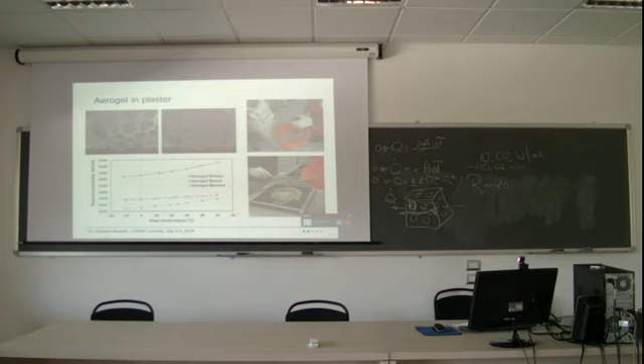Okay, if you start seeing actually the SEM picture of the aerogel, you see these particles of the aerogel spread around the network of the plaster. Okay? So a couple of things that we have been doing with these products. Because these are plaster, we typically use it internally to buildings. And so the hygrothermal performance of these products is pretty important, because typically when you do internal insulating layers, people always tell you, oh, you got a condensation issue.

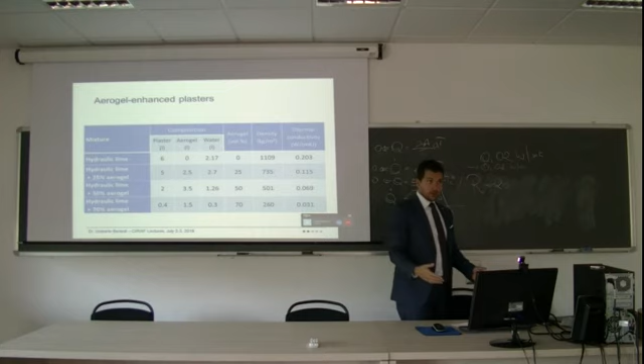Now just to give you the sense of the results, these are actually the products we were working on. This is just a very summary series of the results. These are in percentage the volume of aerogel, and these are the thermal conductivity. Okay, so you typically start with a hydraulic plaster around 0.2, 0.3. By putting 50%, 60% of aerogel, you get a thermal conductivity of 0.03. So in order of magnitude, still plaster, but it's 10 times more insulating.

If you want to graphically look at that, that's basically what's happening. You start from a product that is highly conductive, and as soon as you put more aerogel, you start actually getting a product that is pretty highly insulating. Okay, so this is much better than a mineral wool. Rock wool, the typical mineral wool that you use, has a thermal conductivity in the range of 0.035. So these are products that are better than a mineral wool, but it's a plaster, so you can use it as a finishing layer.

And these are some of the results. Okay, so I'm going to show you hygrothermal performance to give you the sense of this product. The blue line is the plaster without aerogel, and each line is once you start putting more aerogel. Okay. So first of all, and this is a topic that we will touch tomorrow more extensively.

But you know, when people speak about thermal conductivity and look at the Fourier heat conduction equation, they think about this property as the thermal conductivity of a product, and this is typically something you find on the technical sheet. You think about one value, so concrete thermal conductivity 1 W/mK, fiberglass 0.04 W/mK. So you think about one property. In reality, every material has tons of different thermal conductivities for at least 2 characteristics. First of all, at different temperatures, the thermal conductivity changes.

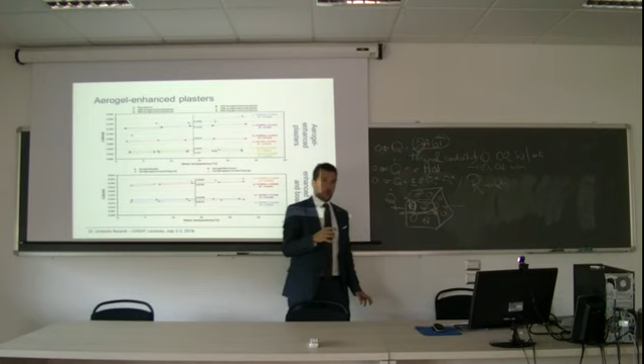What that means is that at higher temperature, my particles will start moving more, and the convection of the air, of the gas phase of a material, is actually easier, faster and more important because the motion of the particles is higher. At 0 Kelvin, thermodynamics tells me particles stop; it's not a temperature I can reach, and so I will not have that much motion. In other words, at that level, the thermal conductivity will be really minimal because the particles do not have the strength to move. Okay? So typically for a product, the higher the temperature, and this is something we will touch again tomorrow, the higher the thermal conductivity.

Okay? So we typically say the thermal conductivity of a product is one value because we typically measure the thermal conductivity of a product at a given temperature and a given relative humidity content. But as soon as we change the temperature and the relative humidity content or the moisture content, then the thermal conductivity will change.

Okay? Now this is something we will come back to tomorrow, because we do a lot of monitoring in the real field, and you realize that the same wall may have a thermal conductivity of one value in winter and a different value in summer. Simply because in summer it gets dried, but then it gets a higher temperature. So it's important to see how these two things actually affect the behavior of the material.

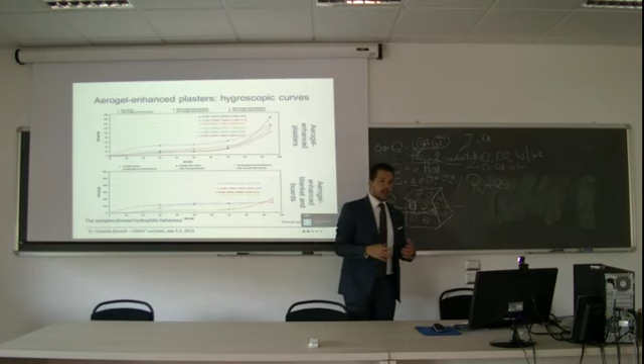So look at this. This is the moisture content, so how much moisture, basically water vapor drops, a material like a plaster can sustain. So these are typically hygroscopic curves, how much moisture the plaster can take. And you see, typically aerogel plasters are hydrophobic. That's the reason why they attach to your finger. The reason why this fiberglass attaches to your finger is because it's super dry. So it takes the water of your finger and gets stuck in your finger. That's why I need to wash my hands at this point, okay? But as soon as you overcome the critical point, they start taking a huge amount of moisture.

Now, if you look at other applications of this aerogel, one of the things we've been doing is making sure that this becomes a super water vapor permeable plaster with aerogel. And the reason why we want a vapor permeable plaster is because you use it in internal applications and the water vapor can flow through the wall without risking any condensation in the wall. And on the other side, we want to make sure that even if the product sustains high relative humidity, 80–90%, it still doesn't collapse the aerogel. So the product basically has no risk of mold and no risk of biodegradation.

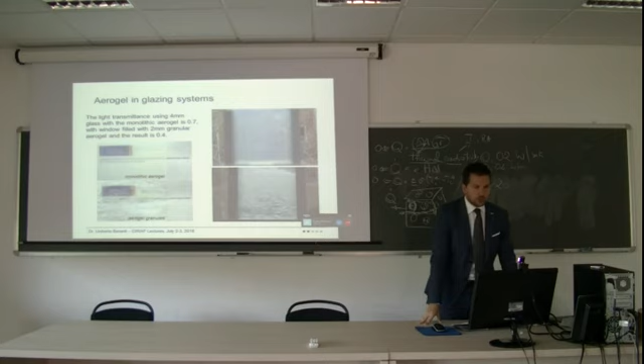These are a couple of aerogel samples, and the reason why I'm showing you is because one of the things we have been using this aerogel for is fenestration systems. Remember the house I was showing you before?

One of the things I haven't told you is that all these windows were aerogel windows. Okay? All the atrium was completely aerogel covered. And one of the things we have been doing is, for example, using monolithic aerogel in typical New England windows. So it's probably not super easy for you to see, but these are all preserved windows of the courthouse of Boston. So this is the city of Boston.

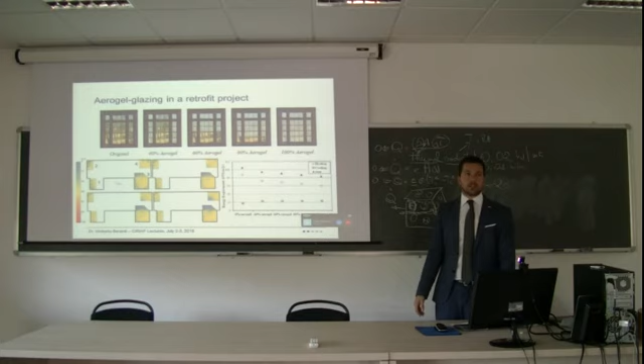Here you see the windows, and this is the final variation of the aerogel that we selected. We basically changed the historical window to this kind of final window. Okay, and this is the lighting monitoring. Here you have the lighting performance, as you may be interested in looking at. If you refer to the paper, you will see the impact of the different windows. Okay.

Now, the thing that we've been more successfully working on, because we've been commercializing it, is the aerogel blanket. Okay. So an aerogel blanket basically means: the aerogel is fragile, it's easy to compress and destroy. So put the gel into a blanket, dry the blanket, and get something that you can take to the field, and the carpenter or the people on the field can actually use it more effectively.

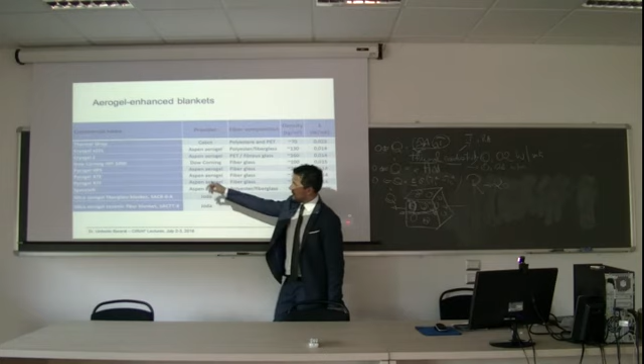Now, this is not only something that we have been doing at Ryerson. Around the world, there are 6–7 different research centers working on aerogel blankets. Only one of these is currently on the market. Okay? The only one on the market is this one. The other ones are research stage products. What they typically do is provide you layers with thermal conductivity as low as 0.013, 0.014. So very highly insulating layers, okay?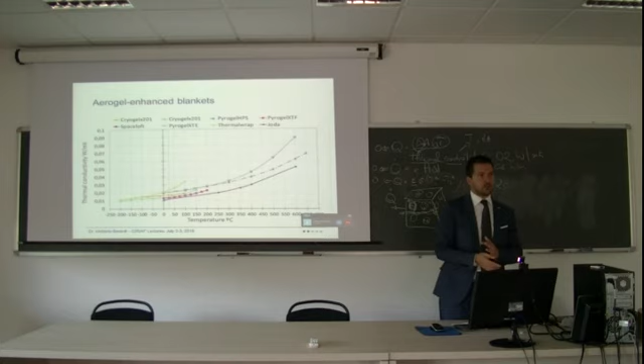Thermal conductivity, the value you're typically using, is the value at 24 degrees. Okay? So let me zoom in so you see. Typically you see the thermal conductivity of a product around this temperature, according to a standard, ASTM C518. So you typically look at the thermal conductivity at this value. But there are a lot of products that have thermal conductivity much lower than the fiberglass we have seen so far. And typically this is the trend of these blankets.

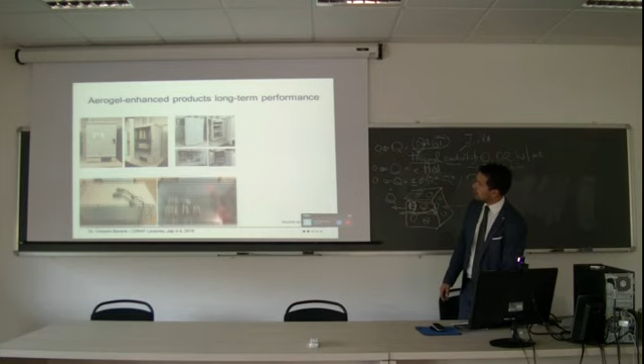A couple of things that we have been doing with these products, which connects to your previous colleagues' studies. We have been looking at these products over years, long-term monitoring. This has been happening by looking at the impact of different factors on plaster, blankets, concrete, all the possible aerogel products that we have been making. And typically that has required temperature fluctuation, because if you use a plaster in Toronto, the same plaster needs to sustain -30, -40 in winter and +40, +50 in summer.

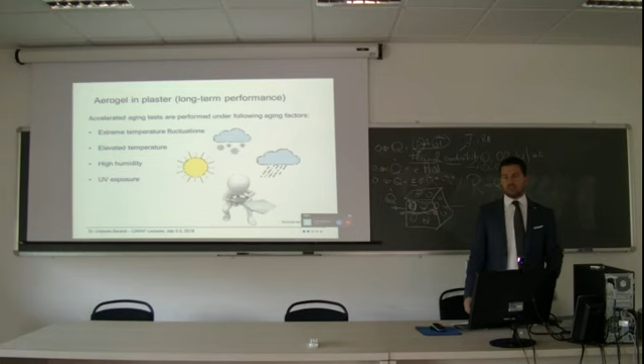We've been looking at the effect of high temperature, so +60, +70 degrees, because that's a pretty common temperature, for example, for a roof. If you have a concrete tile on the roof, 70 degrees is not hard to achieve in summer. And then high humidity and high UV. The reason why that is important to know is because ultraviolet typically destroys the aerogel bonds. So the aerogel chain can be easily affected by a lot of UV radiation. So we have been working in the lab looking at different kinds of aging studies.

Now, just to give you a sense of how these studies typically get done, very briefly, because it may be useful for you looking at these products. Typically, we put materials at a higher temperature than the typical environment, or at conditions with more relative humidity, or with high exposure to ultraviolet, or we put materials into temperature cycling, so up and down in a temperature range, and see what's happening to the dilatation of the product.

So what we actually expect is that the plaster, if it basically dilates and contracts, at one point starts cracking. Okay? So we study the effect on the long-term performance of a plaster in simulated conditions. Now this is something that here, for example, in Italy and in Europe in general, you do because you are interested, but in Canada you have to.

There is not a building product that can be built and put on the market if it doesn't go through a full characterization test of the long-term characteristics. And the reason for this, just to give you a sense of the difference with Italy, is that in North America, everything is under insurance. Your house is under insurance. Your health is under insurance. There is nothing that happens in North America without insurance.

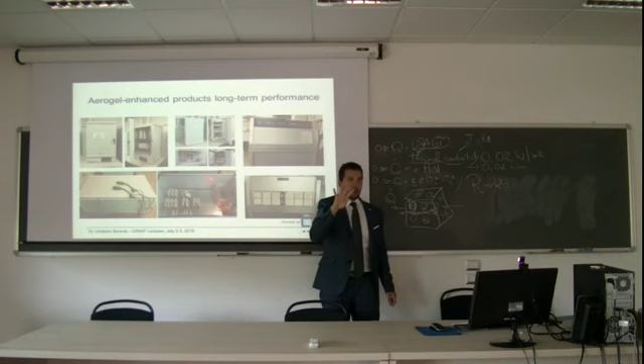So for example, here you see the aerogel plaster, here you see the aerogel blankets, tested with different ranges. And what's happening in this machine? If you open this kind of bench, there are four different things. There are UV lamps, so we change the lamps according to the condition we want to study, and we accelerate the UV exposure of that product.

Just to give you a sense of this: if I am in London, I know it's cloudy, and the cloudiness will take some UV and allow only other radiation to escape. If you come to Toronto, it's always fully clear sky. Toronto, the sun is sitting there in Canada—that's why people 300 years ago moved to Toronto, because they knew that valley is always sunny. So the lamp you need to use to simulate the sky of Toronto is different from the lamp you need to use to simulate the sky in London.

So first of all, it's climate dependent. But you have lamps, and you can program and put in the UV radiation you want. For example, if you come to London, you probably use radiation in a range of 1.1, 1.2 watts per square meter. If you come to Toronto, you easily use 1.3, 1.4 watts per square meter, because on a fully clear sky day, today, July 2nd, you easily get 1300 watts per square meter of radiation. So first of all, you need to understand you're doing an aging test for which location.

Number one. Number two, this is a UV lamp—what other characteristics may affect the long-term characteristics and life of this product? Typically in our climate, it's freezing condition, actually freezing condition with humidity. What happens is when there's moisture in the material, in wintertime it will freeze, will expand in volume, and will crack.

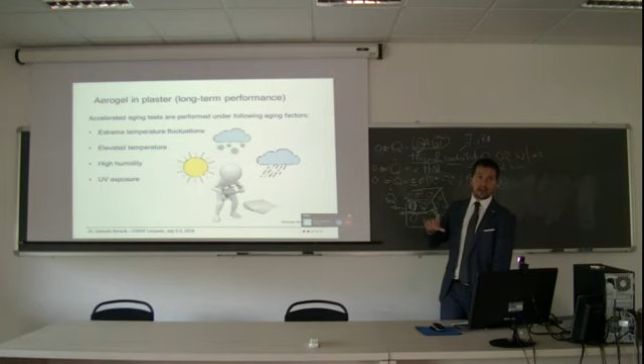That's basically where the lab starts being more interesting, because you can replicate with the dose effect whatever you want to recreate, once you know the activation energy and the distance between the condition you're testing and the condition the material is going to be applied in.

Now pay attention, look at this table. This is a table I developed for the plaster study in Toronto. Elevated temperature, just to give an example, 20 years of elevated temperature were simulated with 68 days in our climate chamber. Freeze-thaw cycles happening over 20 years were simulated with 170 days in a machine that does the same freeze-thaw cycles in 6 hours.

Now, where is the tricky aspect of this? I need 6 months to simulate the effect of freeze-thaw cycles in Toronto. But if this was actually a simulation done for Perugia, freeze-thaw cycles here are probably happening once or twice a year. So in my machine, instead of needing 170 days to simulate 20 years, I will probably need only 1 week to simulate the same number of cycles happening in 20 years.

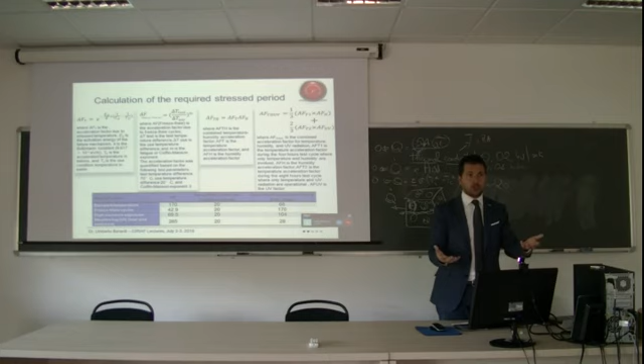The government of Canada these days is putting a huge amount of resources in, because they're extremely poor — they don't have access to electricity, they burn whatever they have to create some comfortable condition inside their house. Children do not go to school, so there are situations with a lot of social aspects. The government of Canada last year put a huge amount of funds available, basically asking us to create new materials to help them sustain a better life.

And the first thing we thought was, okay, we have no idea about the climate condition there. So the first thing we had to look at was what characteristics the material has to have to simulate the effect happening closer to the North Pole, because you have no idea about that.

Aerogel, just to give you an example, one of the first few applications of aerogel in the 70s was in astronaut jackets. We still use it for clothes because it's such a good insulator as a material, still used these days for clothing applications in extreme temperature conditions. Something you don't know: when we buy shoes or jackets, we buy for a given temperature, because they've got different insulating layers in the tissue.

So these are, for example, the results for the plasters. Now I'm going to show you the results for the blankets and the other products. This is the impact of elevated temperature, the impact of freeze-thaw cycles, the impact of high humidity and high moisture content, or the impact of UV exposure combined with other things together. This is a heavily lab-based series of studies.

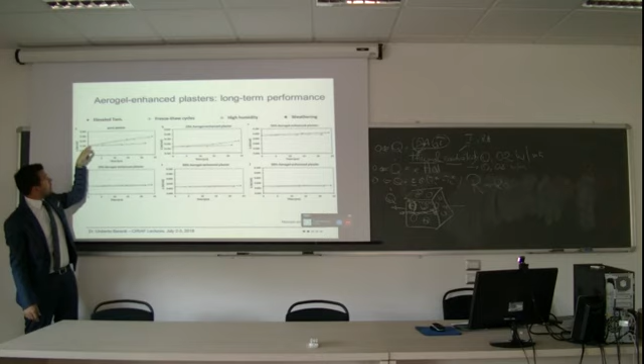When the material is poured, a normal plaster, like the plaster you use here in Perugia, typically high temperature doesn't create that much trouble, but does increase thermal conductivity. High moisture creates a lot of trouble, and you understand that: the material gets a bit wetter, the thermal conductivity increases, and it increases even more when high humidity combines with a lot of UV.

Fair enough. Now if you look at this, what you start realizing is that the fully aerogel plaster with 90% aerogel is basically flat across the different conditions. In other words, it doesn't age at all. The reason it doesn't age at all is because it doesn't conduct a lot of heat, so it doesn't dilate much and doesn't crack at all. Now look also at the numbers: this product is 0.14, so fairly thermal conductive, versus 0.04, 0.04, 0.04. So we're speaking about a material that is 3-4 times more thermally insulating than a traditional product, but also a product that is completely stable no matter what kind of cycle affects it.

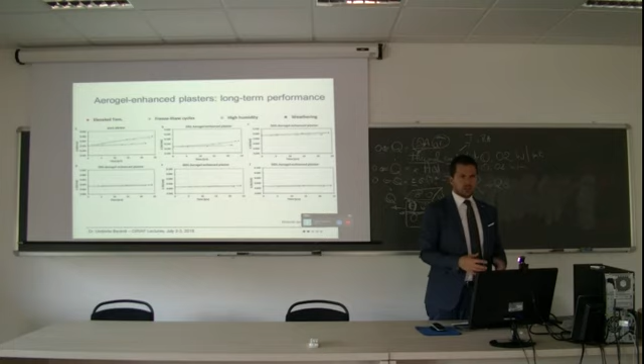So this is a similar study we've been doing not just with plaster, but also with blankets, fiberboard, and gypsum boards. I don't have time, and you're probably already tired of this kind of study, but this is a significant portion of what we've been doing: taking a material, creating a cycle of real test conditions, and looking at the impact on that product. You typically have to do these studies every single time you create your own aerogel and want to commercialize the product, because the customer at the end of the day wants to know if that material is safe to use.

One of the interesting things when it comes to buildings is that nobody likes failures, because failures mean cost. And especially in North America, with the insurance world behind buildings, nobody wants to have any single risk of failure in that kind of environment.

So just to give you a very brief summary of the study, these are different products: plasters, blankets, fiberboard, gypsum boards, and this is the reduction in thermal conductivity for different mechanisms. So for high temperature, for freeze-thaw cycles, for humidity, for UV with humidity. And you see what kind of product suffers the most.

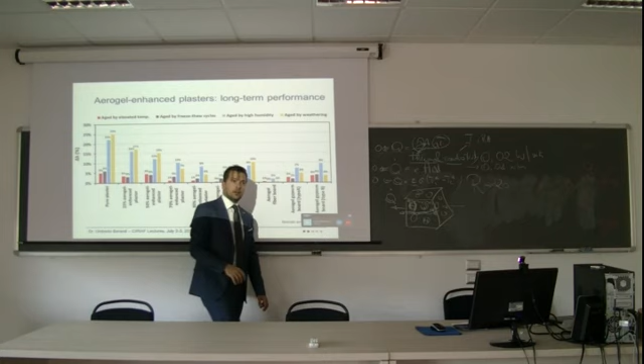So typically a normal plaster, a cement-based plaster, suffers quite a lot from relative humidity and suffers even more from relative humidity with UV. And then with more highly insulating plaster there is very little reduction from these kinds of risks.

Now, this is another good way to sell these products. Not only to compare them in pristine conditions, so new, not aged material, but in their condition after 20 years. In other words, the lifelong value of this product enhances even more the benefit that you see the first time.

A couple of other small applications and then we stop, if you are okay. One, how do you use these products in real buildings? One of the studies we have been doing over the last couple of years is how we put PCMs or aerogel products in real buildings. Now, I do the thermal conductivity in a heat flow meter, in a hot box. Nice picture, nice material, nice application. I go to the site. This is a picture of Toronto last month.

What do you see? I don't know if you see that well. Yeah, you see that well. Okay. Very well.

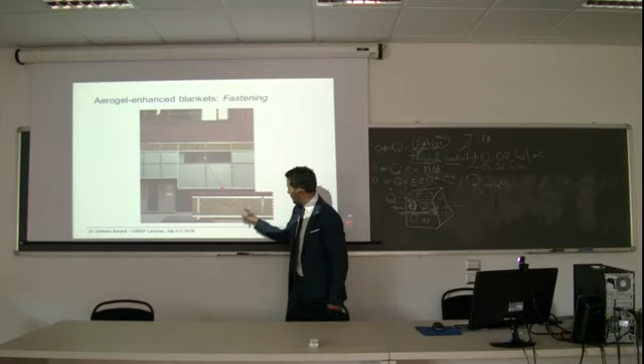So in 0.3 square meters of insulating material there are four sides of aluminum bar, a huge thermal bridge. And if that's not enough, there are 14 steel nails in this piece. Because when you're building a construction 50, 60 floors high, the typical application is guns everywhere, to make sure that insulation is not going to move at all.

But unfortunately, how easy is it to look at this at the design stage? How do you control this? How do you apply an aerogel? How do you apply this to a wall? Just to be honest, as soon as you start puncturing it to attach it to a real wall, you are creating a point thermal bridge.

Now, because people do not trust these products, they put a lot of nails. A lot of nails means a lot of fastening, means taking this theoretically perfect thermal insulator and destroying it with an application that is completely meaningless, I would say. So this is, for example, a bit of a study we did last year, where we started to look at the impact of many different fasteners per square meter and what's the result of it.

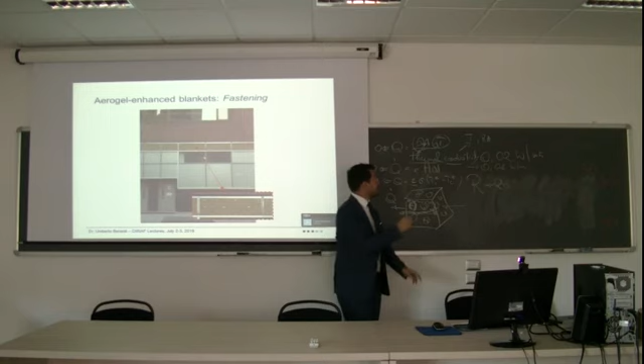Now, to give you a typical application, here in Italy, the typical ratio is from 2 to 4 connecting points per square meter. Now, going back to this, if these are 14 nails, and this is a third of a square meter, this has 40 different nails in one single square meter. So at the end of the day, the thermal conductivity of this portion is the thermal conductivity of the steel. Thermal conductivity of steel, 200 watt per meter per Kelvin, forget about the aerogel.

Just to give you the sense, this is mineral wool, but if this was an aerogel blanket, you would have 0.01 here and then 200 here. So 4 orders of magnitude higher. And unfortunately, this is what typically happens still these days. So a lot of the attention these days in our lab is not only studying the product, not only developing this product, but also going to the field, monitoring these products, trying to detail how people need to use these products.

One of the problems, for example, here, is that it's raining, the mineral wool gets exposed, then one day the general contractor decides to clad it with this black panel, and this product remains inside completely wet. You see, the construction is going up. This tower is already 60 floors, but the podium, the first 10 floors, was exposed for 3-4 months to the wind and chill of -20 in Toronto. And then one day, they decide to clad it and close it, and whatever humidity is in the material remains trapped there. So this is how things get done.

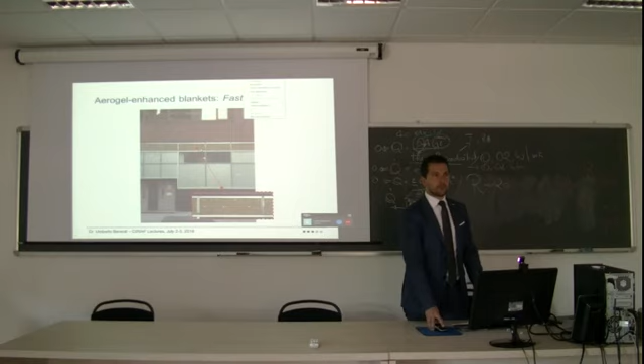So one of the things that we have been doing is trying to look at the impact of applications and what that really means. And the reason why I'm showing this last slide is because for a lot of these highly enhanced materials, one thing is the lab and the 0.01 that we measure in the lab. The other one is the real conditions. Those are pictures taken from buildings we went to and evaluated. What's going to be the thermal conductivity of a wet insulating material? What's going to be the thickness?

For example, a fiberglass has a thermal conductivity that relies on the thickness. But if the material gets wet, it collapses. And it's not elastic, it doesn't go back. So once it collapses and gets compressed to this thickness, even if you dry it out, it doesn't go back as it was. It's like paper. If paper gets wet, when you dry it, it's not elastic, it doesn't go back to the original shape.

And so the idea is, what can we do to protect the products and make sure that the product will always have the properties we anticipated? And what can we do to at least be aware of what realistically could be the condition of the product in the field once some failure mechanism happens? So tomorrow we're going to start looking at effective conductivity for materials that are more familiar to you, like polyurethane, XPS, EPS, and other products. What's the impact of real field conditions on the material properties?